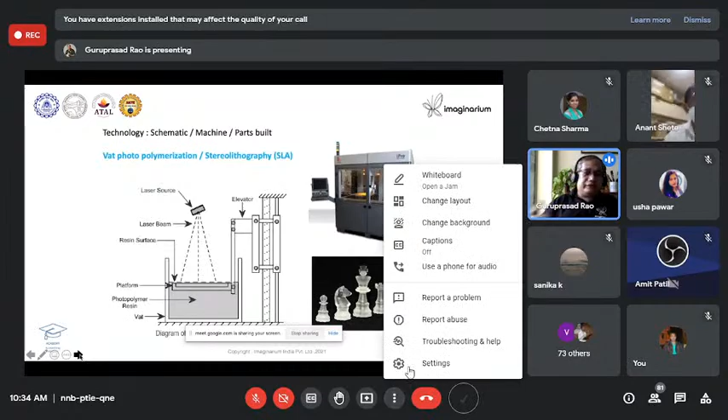SLA stands for apparatus. So many people don't know that. The 'A' was considered to be lab equipment, to do something, they never had a vision to call it a production system. But it became one, and that's the kind of disruption it has brought in some sense.

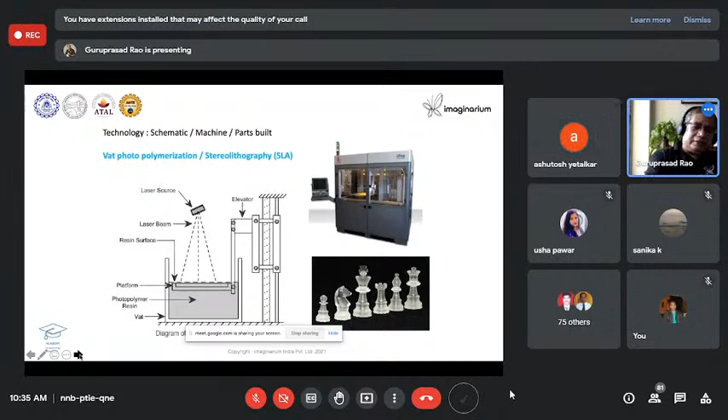So ISO, ASTM and others formed a group to segregate these, and they call it VAT photopolymerization. You can see through this small animation the operation of this.

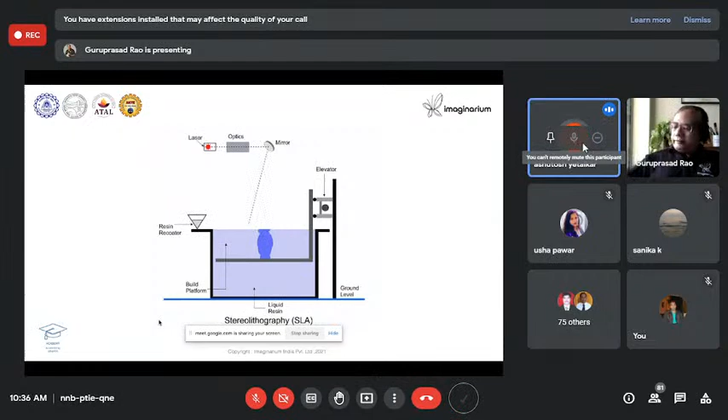This is something like students doing with us.

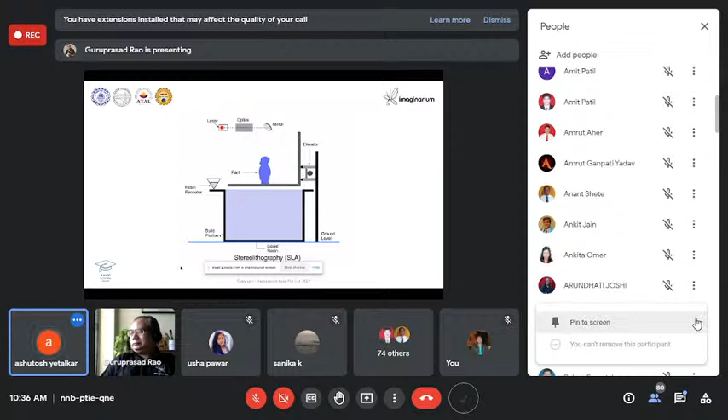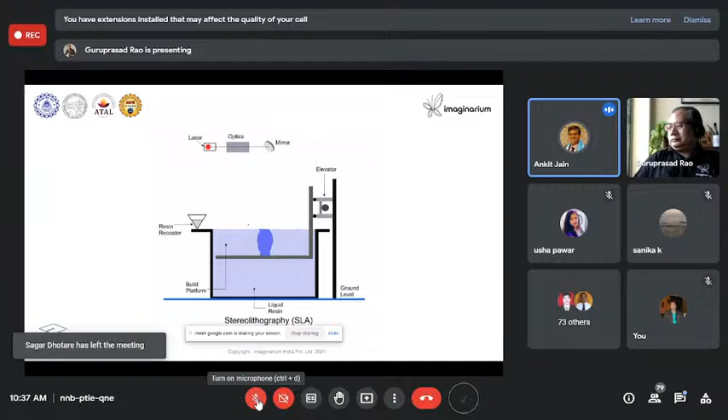You can see this liquid, when you're ejecting it from the table, it looks like this. These are crystallized from the photopolymerization of a monomer liquid. It transforms to a cross-linked monomer, becomes a polymer.

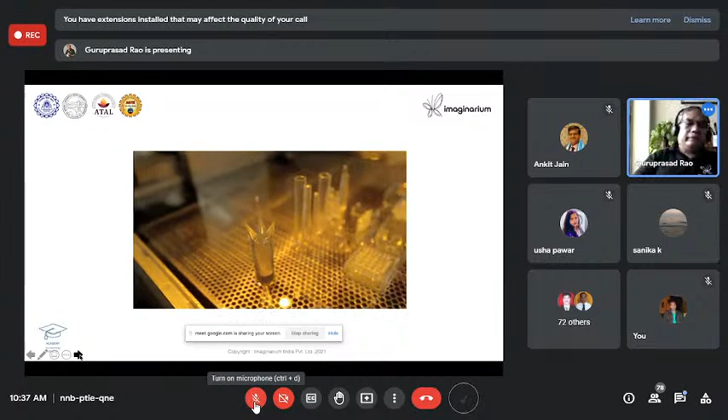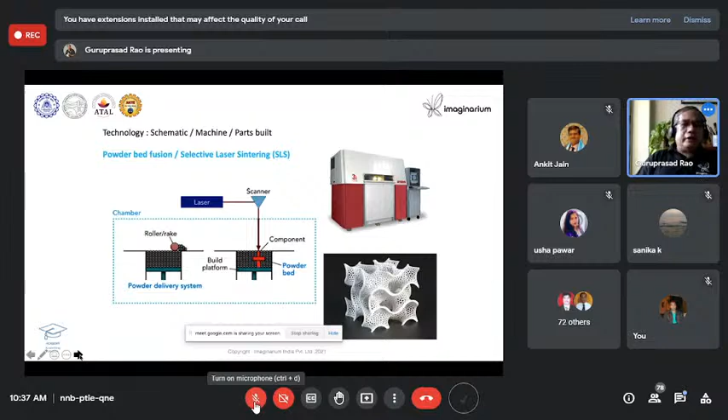And so beautiful. The next technology is powder bed fusion, and the inventor called it selective laser sintering, SLS. It's quite popular and most dear to me because you can create something impossible using this.

Let us see how it looks when we do the animation. There is a powder and a rolling pin that will spread the powder on either side, to and fro, right and left, and subsequently the layers are all sintered, and the sintered layer goes down.

Let us take a closer look. The powder particles are bound together at the contact point. They get a kind of spot weld, and because of the CO2 laser with a Gaussian distribution of power, it not only stitches the top layer, but also stitches to the bottom layer, making a very sound object.

You can see it could be a little bit porous here. This happens with nylon, and when you work with metal also it can happen. So when you increase the power of the laser, you're going to use a fiber laser there, and it is going to have a melt pool, which we'll see in metal. This is how a CO2 laser will bind the layers to make the object.

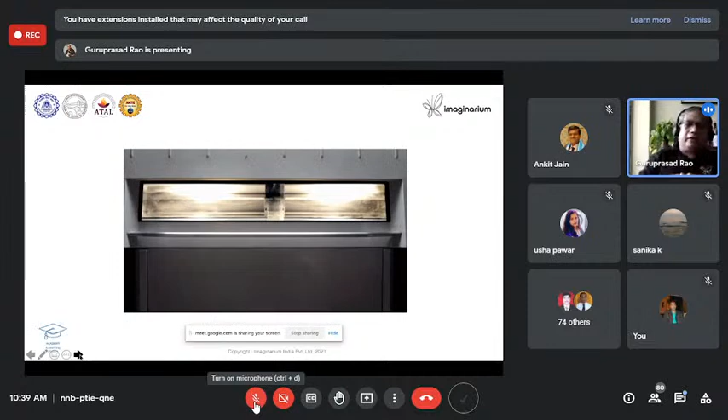Because there is one more layer of powder coming again, rolled and compacted, and the laser is again acting on the same place, the whole thing becomes a concentric cylinder, or tubing, or whatever section. At this point it looks like this, but it can keep changing.

Then you eject the whole thing and extricate these parts, like an excavation in archaeology. The parts are hidden inside, and you uncover them, removing the loose powder off. By this we can actually create objects that are, I'm sorry...

Objects which are interlinked or assembled, or which are nested, one inside the other, can be done, because you can shake the powder to remove it. The powder here acts like a support, and we can play around with the tolerances of two parts which are moving, having a relative motion that can be brought about.

Because in CAD, there is no gravity. You can play, we can keep anything suspended. You can take a sphere and put another sphere inside, another sphere inside in a CAD, because in CAD they stay - it is like there is no gravity in CAD.

When it comes to 3D printing also, it will behave as though there is zero gravity, because powder is supporting it all the place. And when you remove it, when the powder falls off, then only the effect of gravity starts acting on it, and they fall one inside the other.

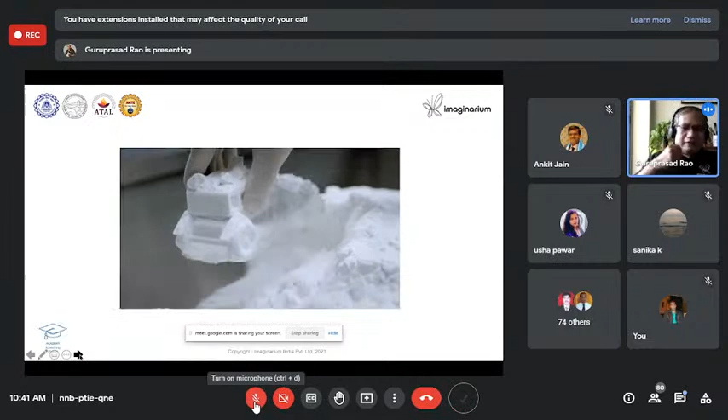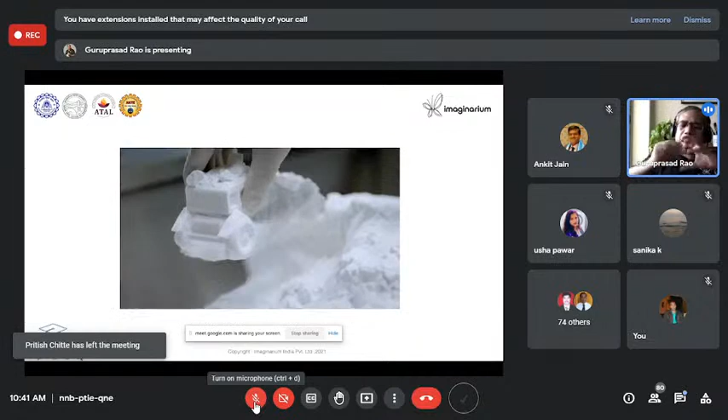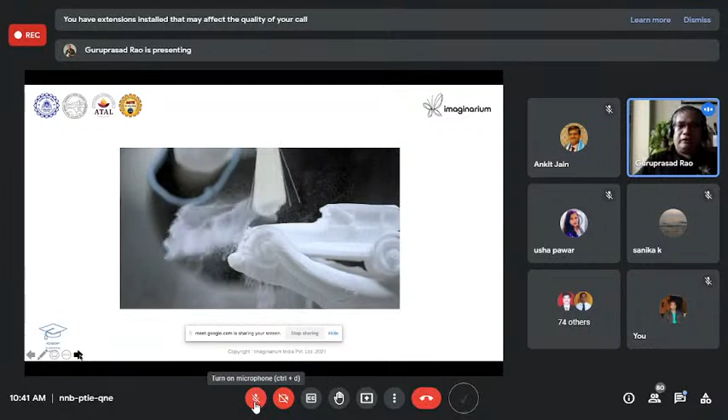People will be wondering how this link happened, how anybody went and assembled it. It's because you've already done it in the CAD itself. It's an assembly going inside, and for this car or Jeep, the wheels move because there is a relative motion that has been maintained. When exporting it, you don't necessarily take it down, but they are concentric, like floating. Once it gets printed, the powder in between will fall off, and thereby you achieve that motion. Hope I got it across.

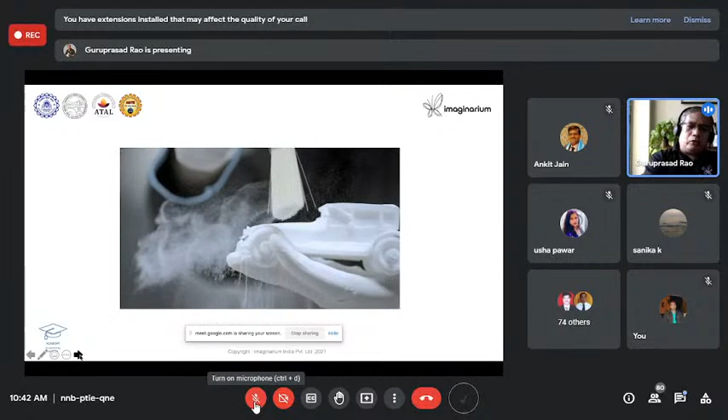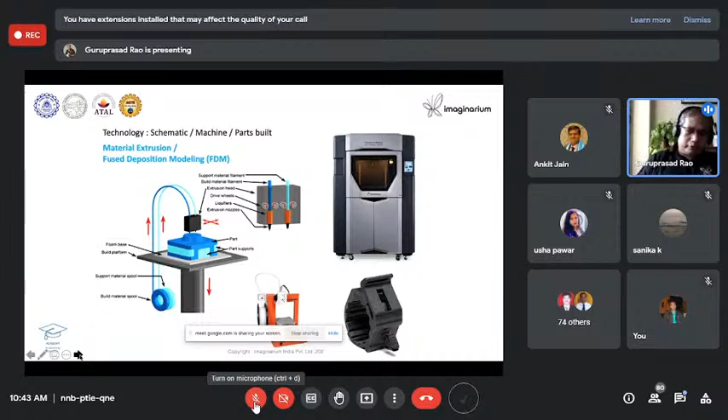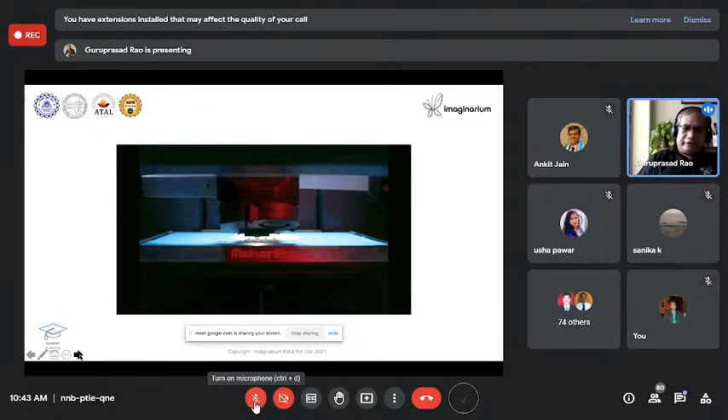So what you see here is a MakerBot. In fact, MakerBot was the first open source commercial machine which came outside Stratasys. Later on, Stratasys kind of bought it over. It was like killing the competition there.

And of course, we have another technology called LOM, laminated object manufacturing. A company called Helisys used to do it with a laser, what you see here on the left-hand side. But they could not actually make enough money, and it became bankrupt. On the right-hand side, you have Mcor.

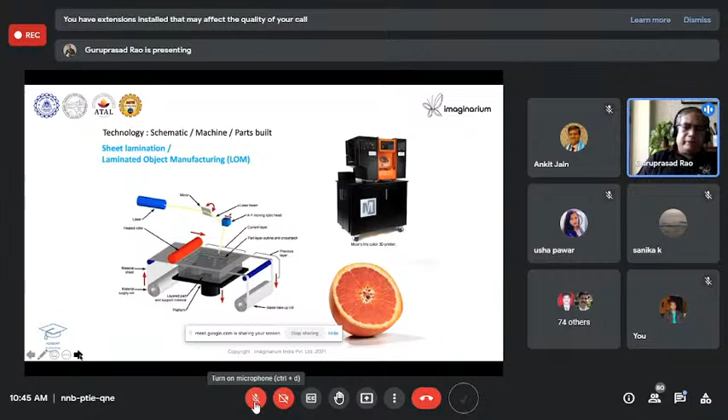This is a company which started using a kind of blade to cut paper, and they were also promoting it as biodegradable because it uses paper and all that. Somehow they could not sell well because industry cannot adopt it. It is not a durable material, and the glue again makes it not recyclable. So whatever promise they made, though it can make a very juicy orange—what you see in the bottom right hand side—this can be made as a model, but it has no other application other than display. It can be used in medicine, teaching purposes, toy making, etc., but it doesn't have an industrial application as such. That's why this company, Mcor, also got shut down, and there is a new company which has come again with the same new avatar.

Then comes the MIT world. MIT America were also looking at this, how to make this technology. They were very close to the analogous selective laser sintering, that is the SLS process, developed in Texas University. Here, they developed something—they were not using a laser to sinter. There was no sintering here. In fact, it's almost a cold process.

So they had gypsum powder and they spread some gum adhesive, and the adhesive, after touching the powder, kind of absorbs the powder and becomes a hard mass. If you spread one more layer, again the print head will print glue, not ink. When you print the glue, you spread the powder, the glue absorbs it, and that becomes kind of sintered. So sintering per se by laser is not required here.

So beautiful, no? It's called binder jetting. Binder means adhesive. Because of adhesive, it becomes a solid. So it is not polymerization, it is not sintering here, but adhesive action. And this particular thing they called 3D printing.

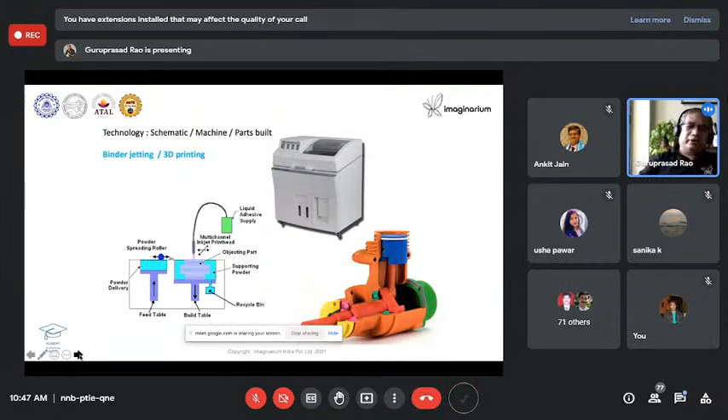You should know this historically. And you can see here a demo of how this wonderful technology works. The powder is first spread. When I spread the powder, it is like paper only—on paper, you can have a plotting or anything.

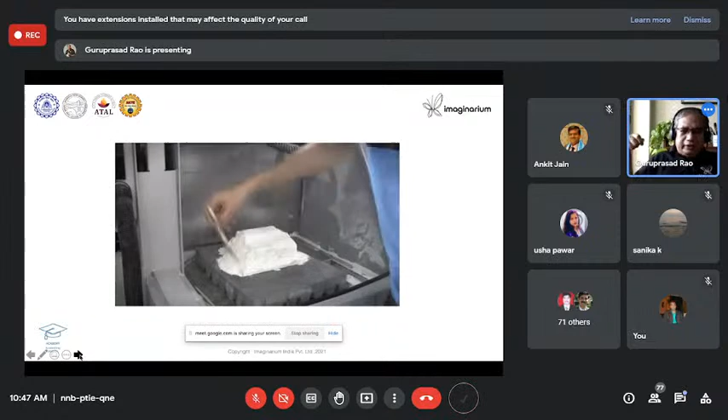And if you do the plotting, you normally think of only 2D. Here, because it is going down every time, you can see the whole building comes out. When you vacuum the powder off, you'll be able to see the building emerging, like magic.

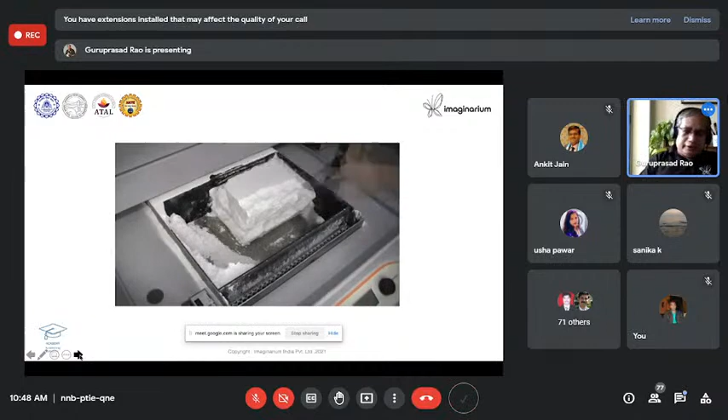The same thing happens in SLS also, with one difference - this is binder jetting, that is selective laser sintering. There the action is by laser, here the action is by binder. Binder means glue, adhesive.

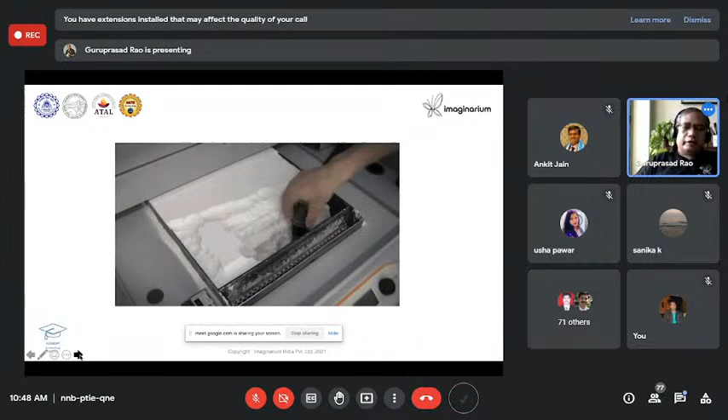We can try this in your colleges. You take atta or anything like that, put some glue, take a stencil and screen print the glue, take it out, spread one more layer of atta, put glue again, and you'll be getting the same thing.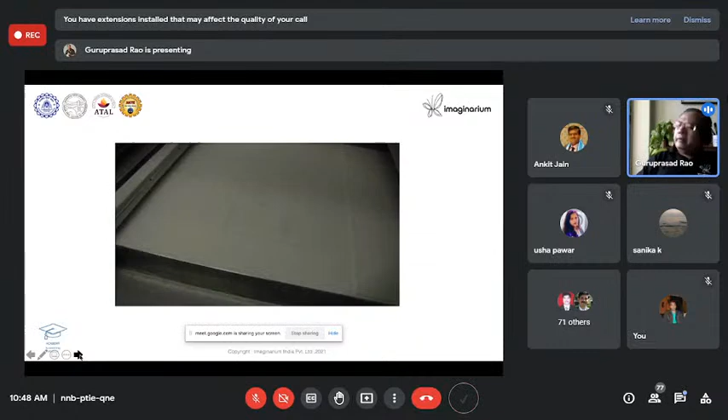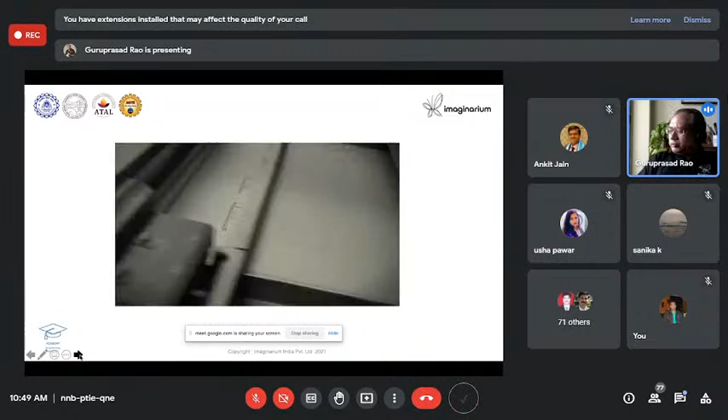In fact, selective laser sintering was also done the same way, putting powder by hand, very funny. And that's what they did, and probably that's what they did in metal also. Much later they all mechanized it. Now it has become a machine with all the things.

Yet another wonderful technology is material jetting, wherein for the first time you're able to create a kind of functionally graded material.

That means I have component A and component B. I can mix them in varying proportions, and the target, the end result, is either more of A and less of B, or more of B and less of A, or equal A and equal B. So I can play with things like, in the same component, one side transparency, another opacity, one side hardness, another side softness. One can achieve that kind of thing. So they call it a digital material.

Why is it called a digital material? Because by computing and programming, I'm able to specify what is the hardness, what is the transparency I need for that particular small 3D pixel. A 3D pixel is called a voxel. In that particular small cuboid, whatever property I want to assign, I can actually program it.

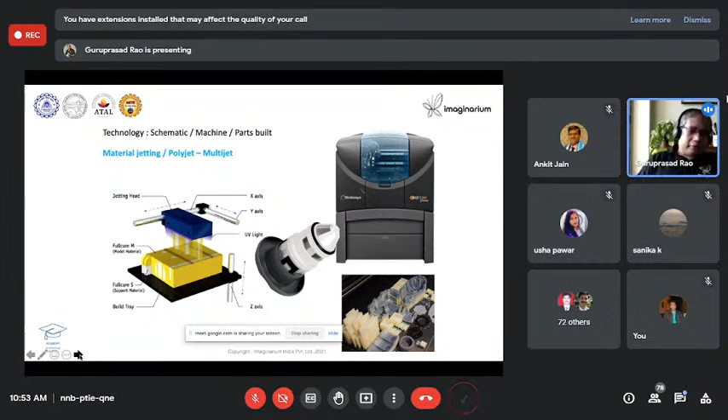You can see in material jetting, the consistency is like a paste, like toothpaste. So they put it on the substratum, and it is exposed to UV light. So it's a photosensitive paste, a photopolymer paste, I can say.

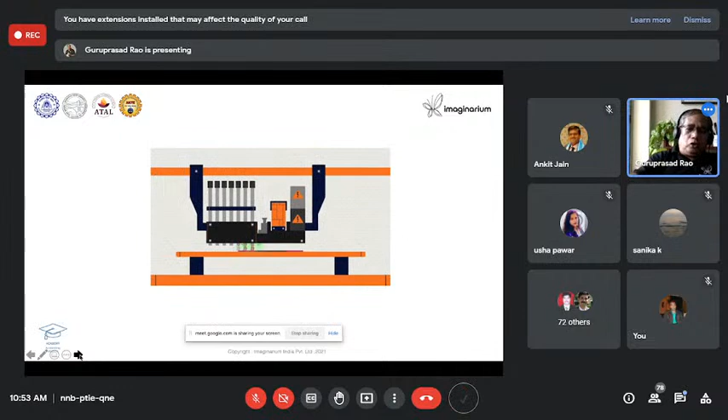So it is material jetting here, not binder jetting - material jetting, because material is getting deposited and UV light exposure makes it set. So it locks it. There is no further reaction that can happen.

Then we have, of course, directed energy deposition, another major technology. In fact, a class of technologies go under this - electron beam melting also. Electron beam melting, sometimes we classify under powder bed fusion also. So a lot of things there.

SLM, you have EOS having the DMLS - they're all one and the same, different semantics, that's all in a way. And nowadays people are even trying to use feedstock as wire, metal wire.

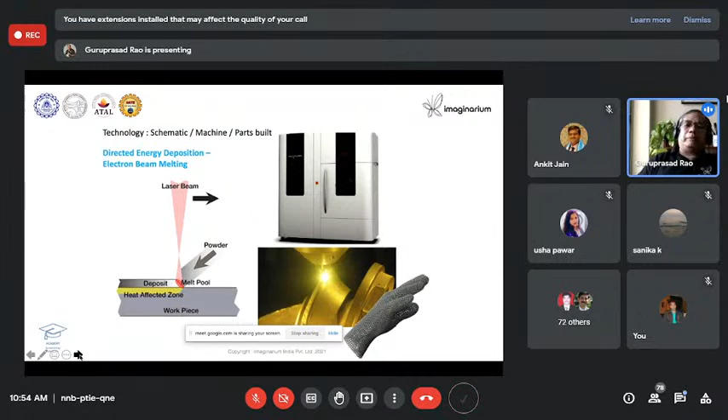Metal wire technologies are going to really disrupt compared to powder-based ones. In metal printing, the powder gets molten, and this molten metal has higher specific gravity than the powder, so the whole thing sinks. That's why in metal printing, supports are an absolute must. There are exceptions, but this complicates metal 3D printing compared to polymer printing.

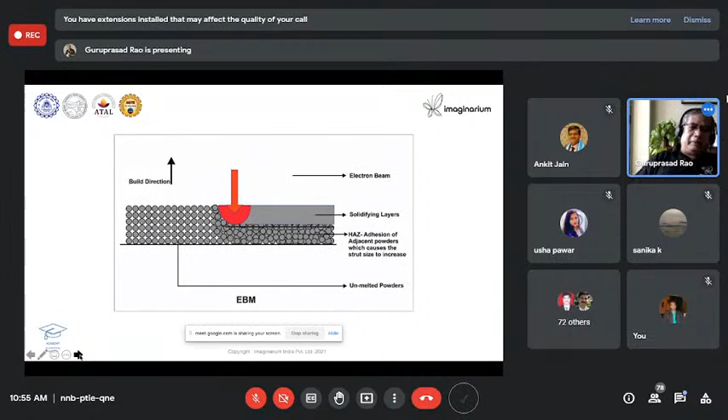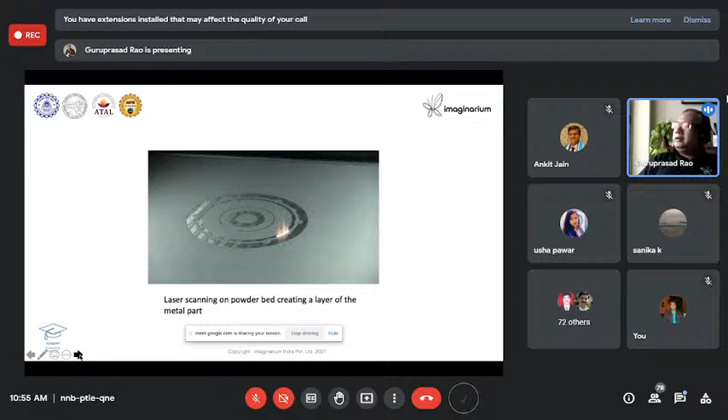It will start sinking or shifting, and as more material gets deposited, the heat capacity increases. So the thermodynamics, the heat and mass transfer, the stability, the mechanical heat-affected zone - all of this matters, and the heat has to be taken out quickly. This heat scavenging is going to be very important as we move forward.

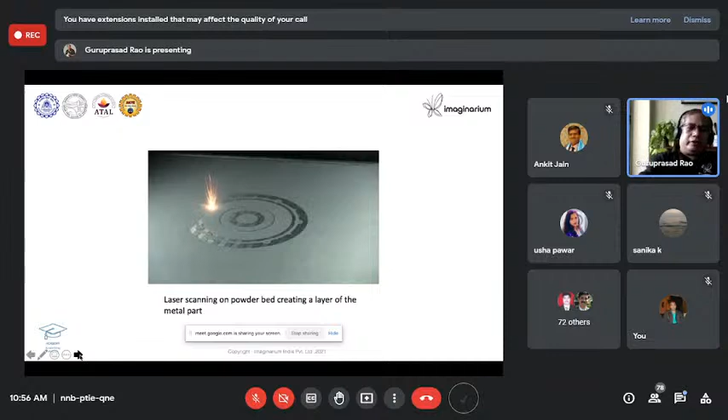People have tried using powder or wire, feeding it to a tip with a laser beam, and when the powder comes, the whole thing melts and you deposit a drop onto the substrate. It's called a drop-on-demand kind of process. Using many drops, you're able to actually build up the entire part.

This is very interesting because this can convert any CNC machine into a metal 3D additive system. I'll show you some examples, maybe in tomorrow's talk, where I'll go a little deeper. These are some of the metal printers we have.

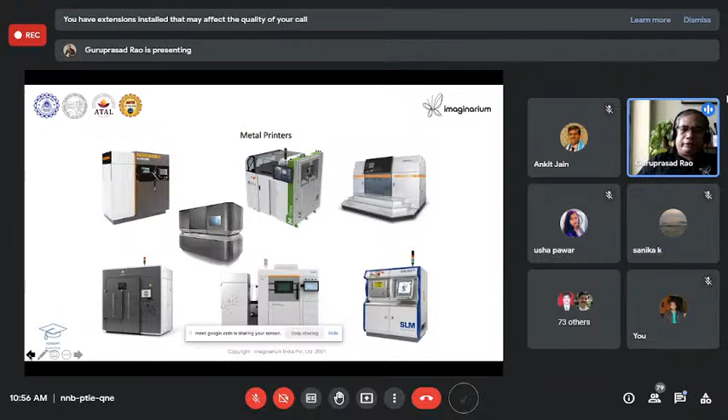So far we have been looking at all these boxes - they're all boxed, enclosed systems. Now you see something which is out of the box. This is a KUKA robot, a general purpose robot that can be programmed in multiple ways.

What people have done is put a kind of big syringe with a magazine feed of red clay, and it is getting deposited. The data is actually read from a computer. So the question is, can we call it a 3D printer? Yes, this is a 3D printer because it creates an entity, building layer upon layer, and it gets its input entirely from digital data.

In fact, it is out-of-the-box 3D printing. It can print not only in one station but all around it. So if you're thinking of a food printer, it can make something, and once that's ready, it can move to the next station, and the next, all around. I think robots have the highest dexterity, and I believe a lot of future 3D printers will be based on robots.

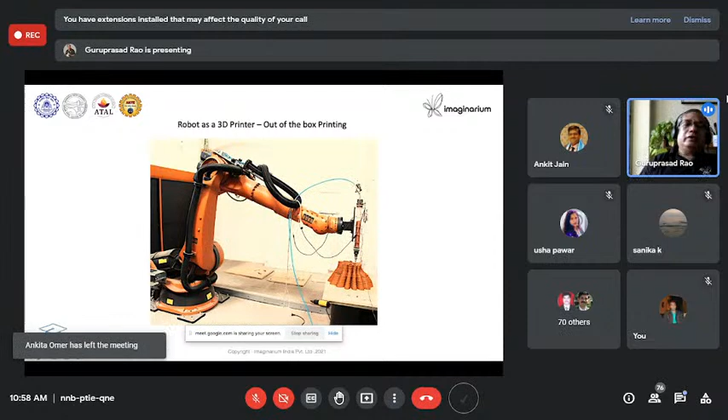And look at this, a 3D doodler. So my question to all of you: can we call this an FDM printer? You can unmute and answer this question - can we call it an FDM printer?

Yes, sir. So how many of you say yes, along with you? Yes, sir. Yes, sir.

Well, no, it cannot be called a 3D printer because there is no digital input data. It behaves as though it is an FDM printer, but it is like a glue gun - it's like applying mehendi, and it is, no doubt, depositing layer by layer. But forget that - it need not always be layer by layer, but digital input data should be there. If it's not there, then you can say it is not 3D printing. Got my point? The hands are there, and you've got thinking in the brain, and it comes out, and you are forming something - that cannot be called 3D printing.

So you can see how it is being done. But what happens if this hand is replaced by a robot? Can we call it a 3D printer?

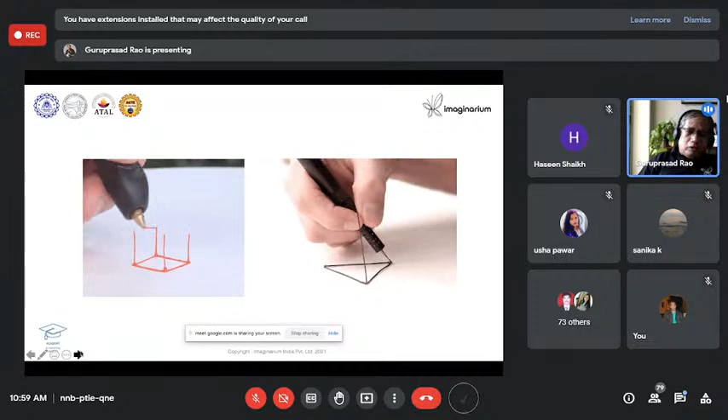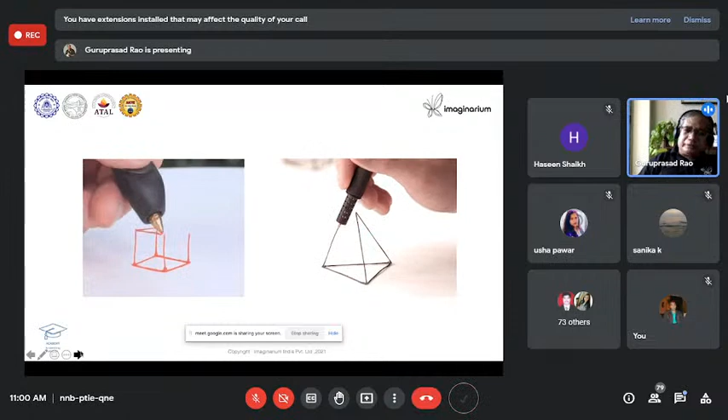What if I replace this hand with a robotic actuator? Then we can call it a 3D printer - it becomes the same as your cooker example. So let us see one example.

See this one - this is, in fact, depositing not even on the ground, but against gravity. It is depositing something on a side wall. And believe me, even this can be called a 3D printer because it is getting digital input data. It can make one, it can make 100, it doesn't get tired, and you can check the consistency too - it is going to be the same.

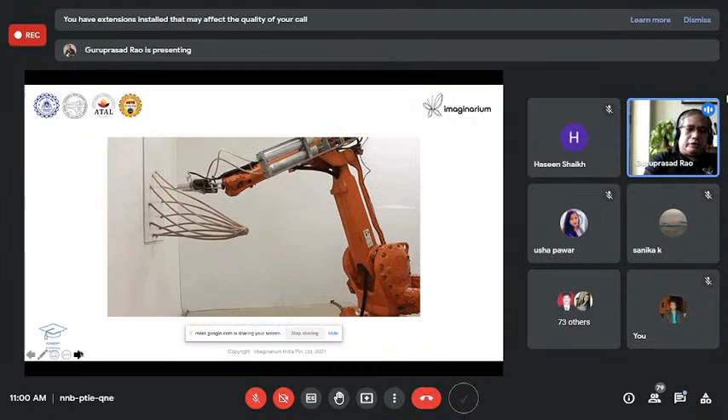So you can see how robotics are actually changing the way we look at 3D printers. In fact, additive manufacturing is not the same as printing many things in this world.

Moti is additively made. Onion is additively made. You have so many things like that. Wood, you cut a big tree, you have annual rings there. Why? Because the girth is increasing every day, every year by organic means of material deposition, right?

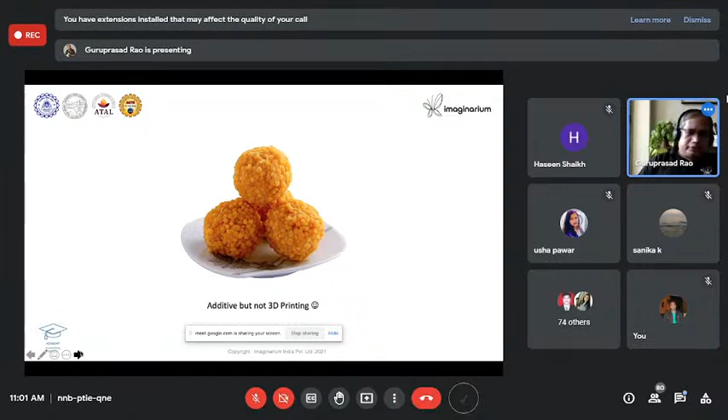So it's very important when you're going to teach creative students, it's important to understand this. Somebody may say, 'Hey, this is additive, but it is not 3D printing.' What is the example you can give? Laddu is there, very interestingly. Additive but not 3D printing.

I want all of you to understand one thing here, very, very important. There are so many slices here, very much similar to 3D printing. At every layer, it is made up of so many layers. At every layer, I can put chutney, or cheese, jam, ham, or anything, vegetables and all.

So it changes. For example, if you take a casting, I cannot do that like this. To some extent, sintering you can do, but even sintering is difficult because after you have powder, you compact and you sinter it. That's it, you cannot necessarily change the layers. But in 3D printing, I have control over every layer. At every layer, I know what I can deposit. Isn't it? That is very important.

By this, what we can learn is, in 3D printing, we have the capability to control what you deposit every layer. Depending on the treatment you give, it will change the property. For example, laser exposure also, power also, I vary, and I can create different material properties. That is the beauty of additive manufacturing, which is not there in forging, not there in injection molding, not there in die casting, definitely not there in CNC. That is the greatest advantage we have with additive manufacturing. We are able to control properties at a layer.

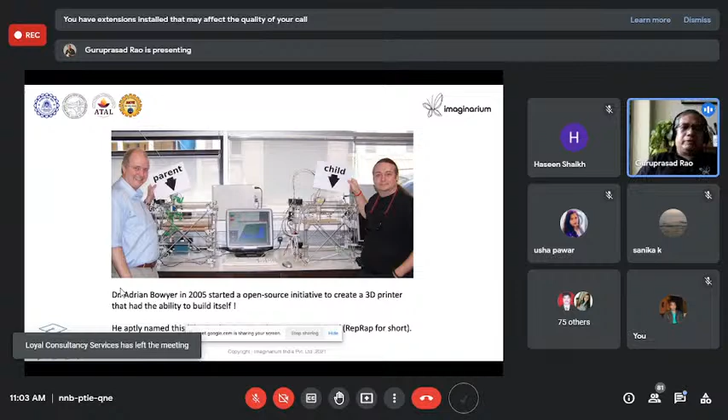And I told you, with digital material, you can even control the property at a voxel level. Voxel is a 2D, 3D pixel. In fact, it is Adrian Bowyer and his team who started mooting this concept of parent and child, 3D printer printing itself. So cartoons like this appeared.

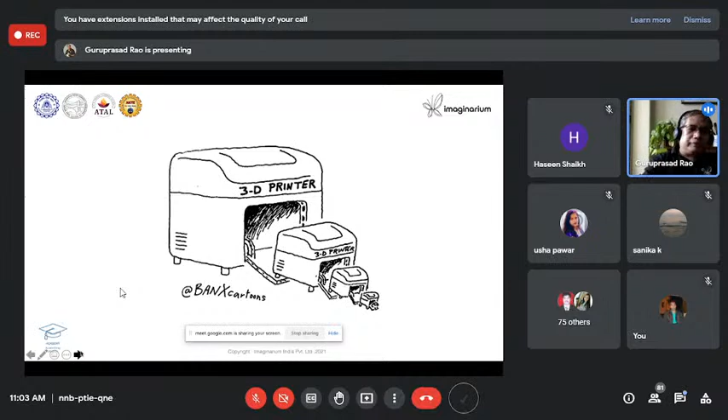In fact, yesterday on Facebook, I saw something I want to show you. A manufacturer files for bankruptcy. Why? A 3D printing company asked a client not to print 3D printers. So if you are selling a product, using that product, you are going to create the same product again. Like what we saw here, somebody has done this with a Mojo printer. Some of you must be knowing Mojo printers. So these are fun. I mean, it's not really happening, but it may happen one day.

In fact, we have a technology called multi-jet fusion, MJF. There, 50% of the parts are printed by the same machine. Can you believe it? More than 50%. So many rollers, gears, stoppers, many things are made. 50% of the parts are from the same printer, printed on a similar technology. I can say it's not the same, but still.

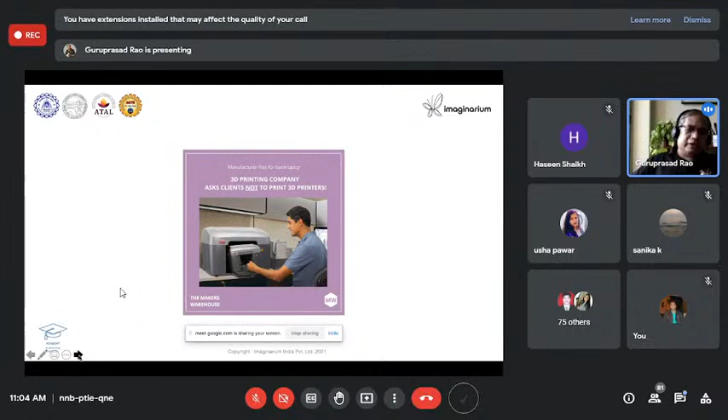So today we have these consumer printers which are coming in all shapes and sizes, and the whole technology, once it got adapted, is making deep inroads into various domains in manufacturing. It could be aerospace, automotive, dental, electronics, jewelry, medical, FMCG packaging, lifestyle, architecture, white goods, electrical, plastics, and many more. Gifting also, customization, it goes on and on. Food, cloth, you have—what you cannot print is the question.

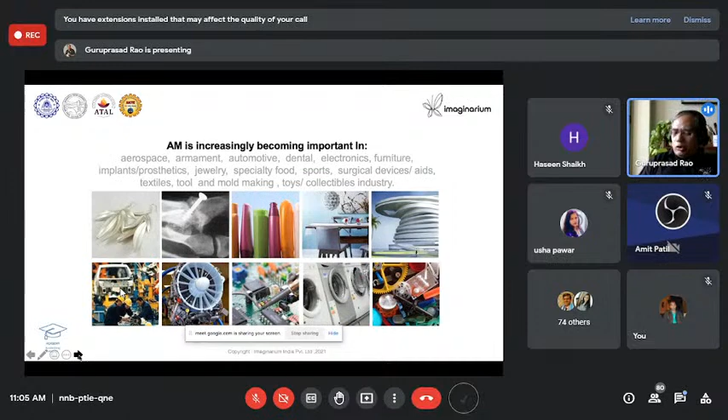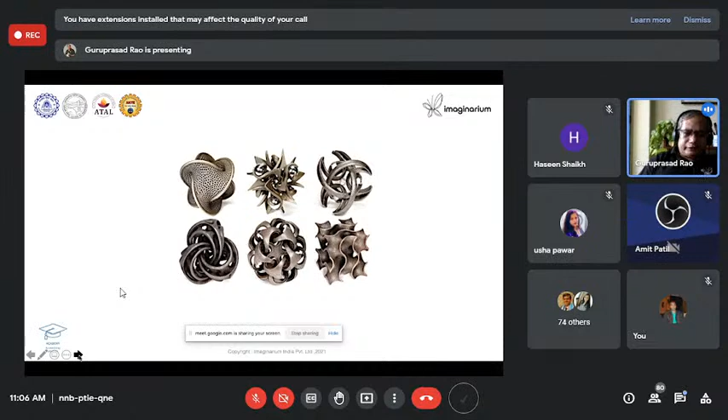So what you cannot print is the question. So what are these? These are truly unimaginable products, and also impossible to make products. Okay, but they're all possible today, thanks to this technology.

Now, at this point, I would like to stress upon the beauty as an industry person. 3D printing is used mainly for 6 reasons. There could be many, but I consider them my top list. One is part consolidation—that means I can take any bill of material and squeeze it to one item. So you can make about 31 to 1, 50 to 1, 300 to 1, kind of zipping where one can do part consolidation. Part consolidation brings a lot of reliability to the system because the variabilities are reduced here.

And jigs and fixtures also, we can quickly make something on demand. That's why it is being used.

Lightweighting is something which is very important. It is required for airborne systems such as rocketry, satellites, and airplanes. And why not drones also, for example. Drones people are using, where payload is optimized by reducing the total dead weight of the equipment. That is done by lightweighting.

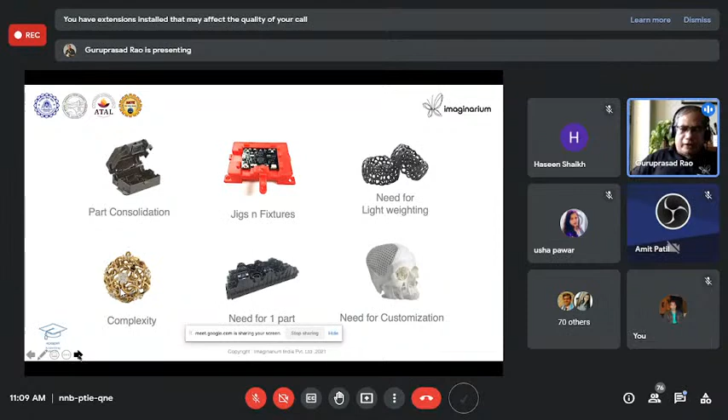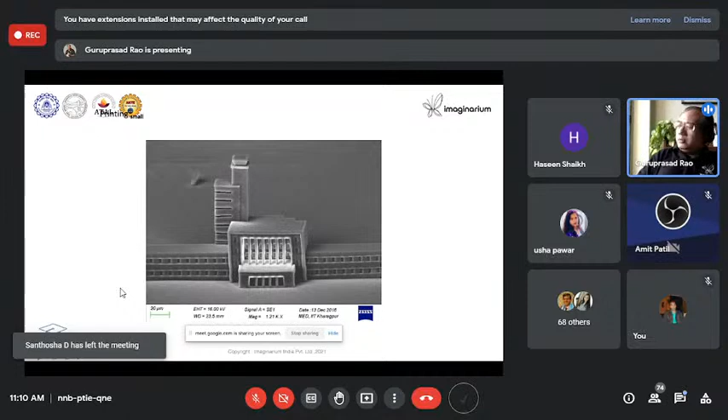So people have tried to print something big, and people have tried to print something small also. You can see the Nanoscribe can print very small. In the bottom left-hand side, you have a 20 micron green line, and that shows the scale. So those verticals on the window at the top can be made - definitely at the micron level.

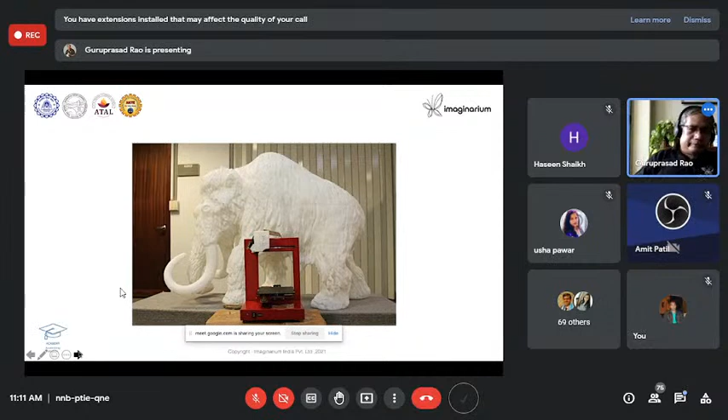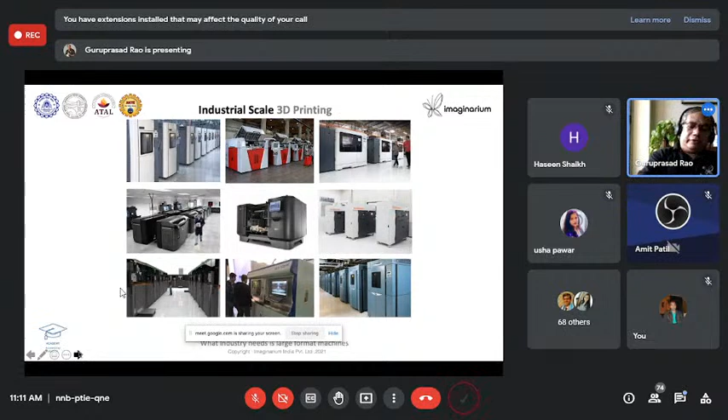So the industrial scale 3D printing will look like this: shop floor clean and cool, no dust, no oil. This is the future factory in a way.

This we have been emphasizing, as your faculties in the morning also described. Complexity will come for free and there is no economy of scale, because whether you make one number, 10 numbers, 100 numbers, 1,000 numbers, or 1 million, the rate for one part will not change so much because it is a layer by layer deposition. It has to make so many layers, only then it's ready. So it is very important.

We cannot compare it with conventional manufacturing, subtractive manufacturing, when it comes to bulk production. But complexity wise, in conventional manufacturing, the more processes go on, the more you touch it, you actually lose value. So people say complexity comes for free is not really always true, but in a way it is tapering off slightly.

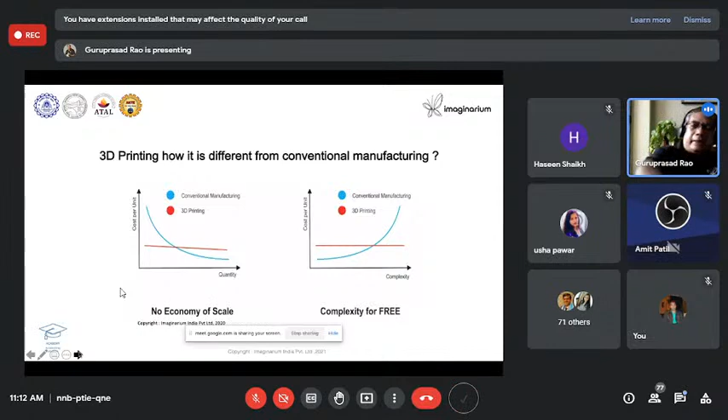So where do we actually see this technology in the manufacturing world? The volume game even today is done only by subtractive manufacturing or other conventional forms - injection molding, die casting, or vacuum casting. In the middle, you have CNC, which makes few batch quantities, and 3D printing is at a very different place altogether: low numbers, but highest complexity. That's where it will be viable.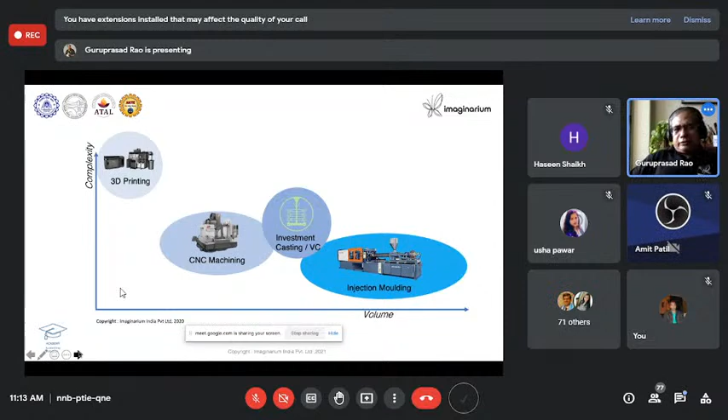In the earlier days, when Chuck Hull started looking at this technology, at the center of the whole thing was the hardware. Of course there was a small piece of software to slice and convert the model to a triangulated model, STL, and a few materials. That's it. So the opportunity was more in terms of hardware, software and material - they were just complementing each other. That's all. But soon, today, it has changed.

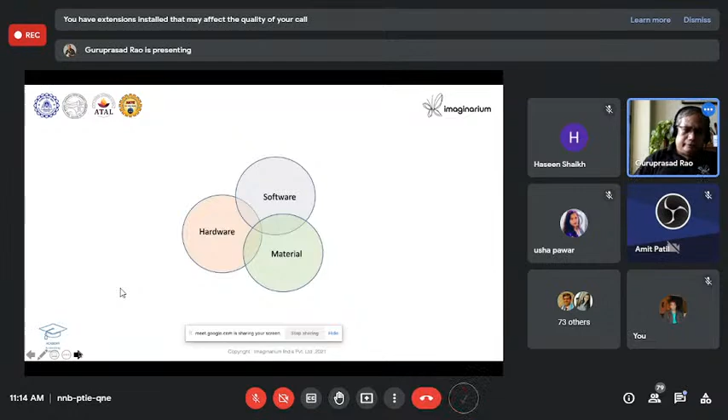Hardware, software and material now have a lot of overlap. And in future, the hardware will become mostly saturated, and once it's saturated, a lot more...